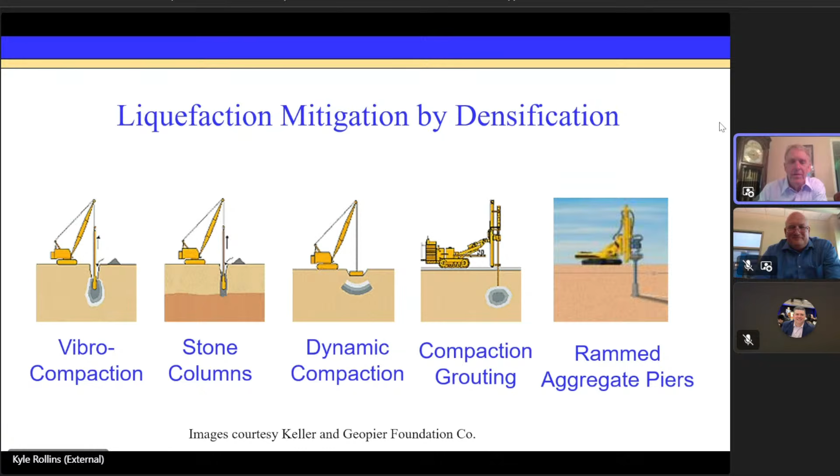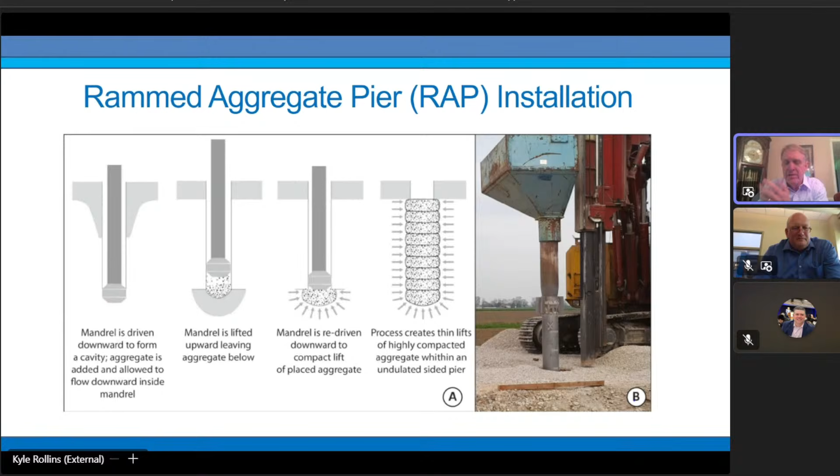Rammed aggregate piers use a mandrel that is driven into the ground surface to the depth you want to treat, and then gravel aggregate is put into the pipe, the mandrel. Then it's raised maybe 3-4 feet, and it has a compacting surface at the base that compacts the soil downward maybe 2 or 3 feet. So you have a lift that's compacted by impact and vibration. The idea is that this creates a compacted column of coarse aggregate, maybe half an inch D50 size, and it goes down through this mandrel and through the hopper at the top.

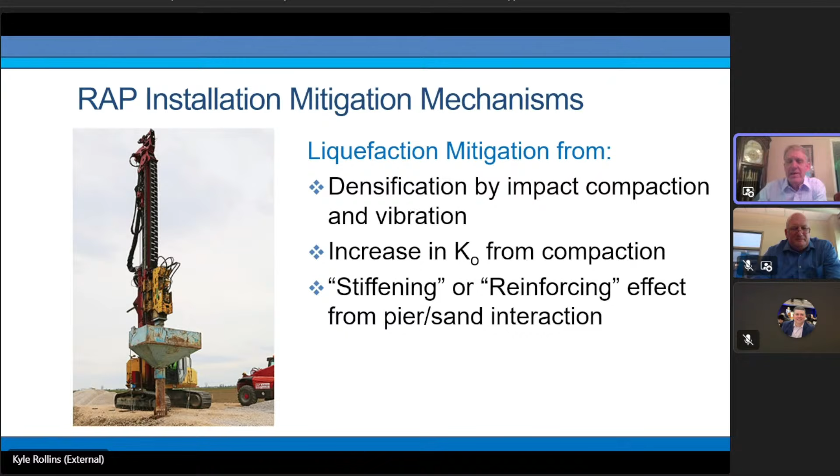There are a number of mechanisms that might contribute to reducing the potential for liquefaction. They include densification by the impact compactor and vibration that produces. Secondly, less well understood, is the increase in the at-rest earth pressure coefficient, K0, from the compaction process, because you're expanding the zone, compacting it into the side of the existing soil. That's likely to increase the horizontal pressure. Then there's a third effect that's even less understood, but we are seeing it more often: the stiffening or reinforcing effect because of the interaction between the piers and the surrounding soil.

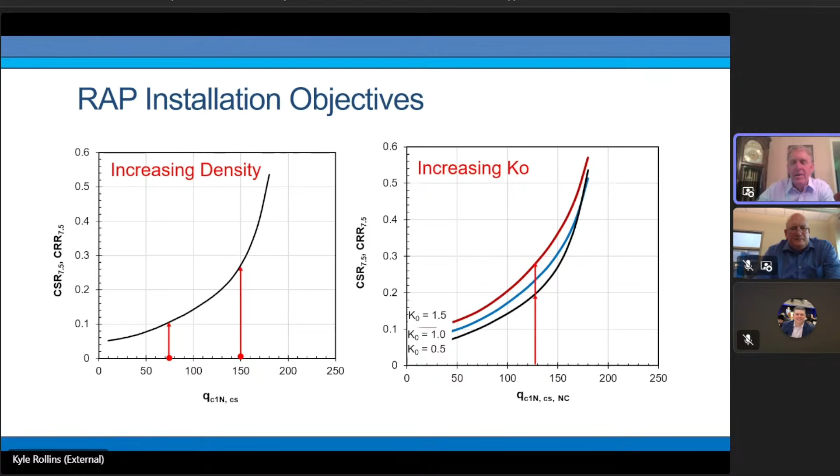But there are also some issues with the at-rest earth pressure. We know when we compact soils with the rammed aggregate pier approach, we increase the K0 value. The idea here would be that if we increase the horizontal earth pressure, we could also increase the cyclic resistance ratio due to that increase in K0. Not always considered, but an important effect, and I'll explain this a bit why.

What they showed in their paper was that the net result was no net improvement in the cyclic resistance ratio, the CRR, as K0 increased. Now that was back in 1997, and there's been a lot of additional work carried out.

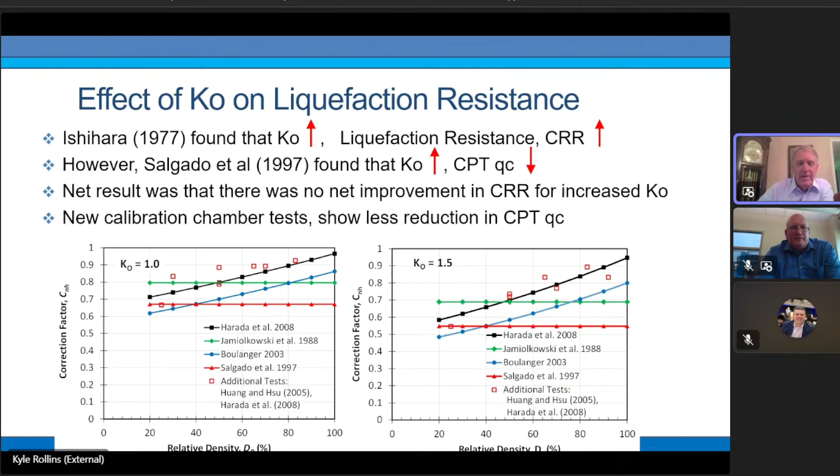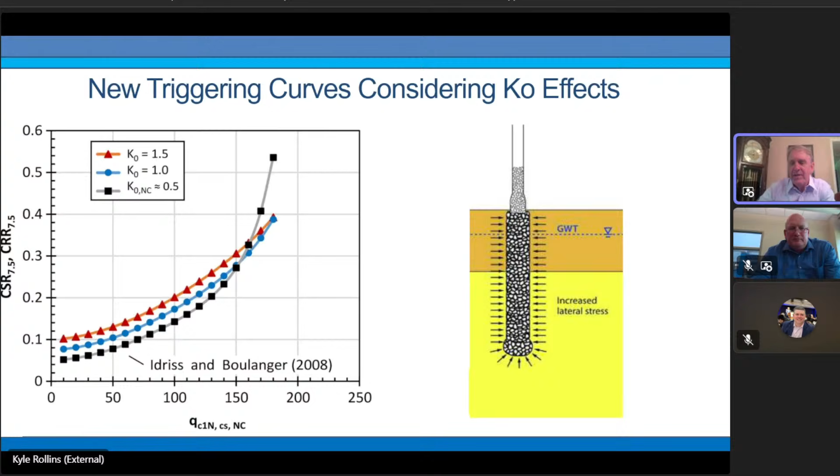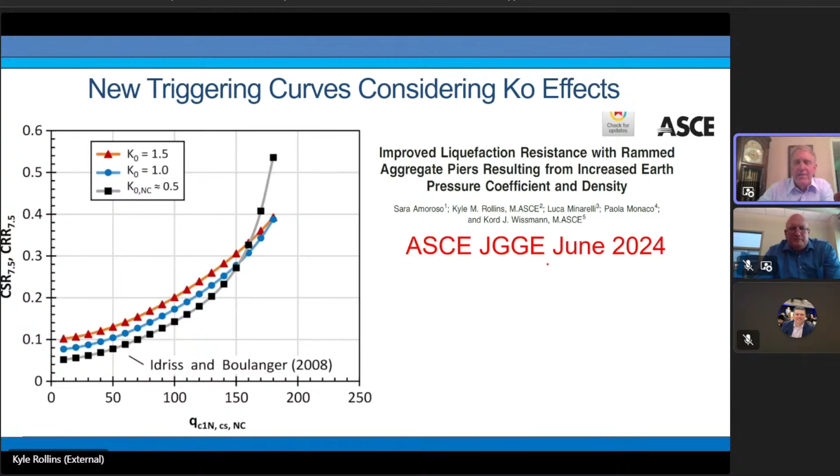So in a recent study, we took all the data and used this curve by Jamiolkowski. It's not the most liberal, but it's kind of conservative and top end. When we put that into the equations, we see an increase in cyclic resistance ratio with increases in K0. So as we're increasing the lateral stress from this and other methods, we could use these curves that are published in the ASCE Journal of Geotechnical and Geoenvironmental Engineering paper, journal, in June 2024.

So this gives us a logical basis for including those effects. One of the problems of considering K0 is that we have to estimate what it really is, and this is not as easy as we'd like it to be. There are equations proposed based on CPT and the dilatometer K sub D, but the best equations appear to be when you combine the effects from both the dilatometer K sub D value and the density from the Q sub C. When both of those are used together, you get the best estimation of K0.

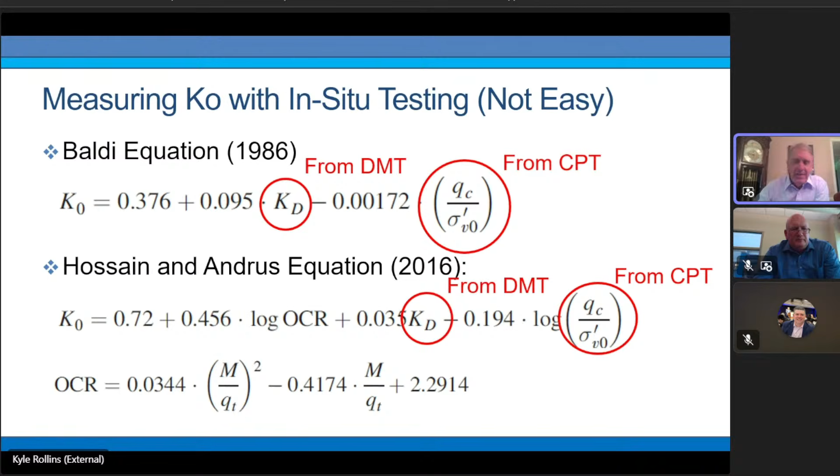Hossain and Andrus at Clemson did a similar thing using both DMT values and cone resistance QC values to estimate K0. But again, that uses both CPT and DMT data, which would require you to do both tests.

So as we do our research, we have this philosophy that one good test is worth 1,000 expert opinions. This was said by Wernher von Braun, who was the designer of the Saturn V moon rocket. And this wasn't because we're down on experts. We all want to be experts. That's why we listen to things like this and attend ASCE Geo-Institute congresses and so forth. But it means that we have to understand how the world really works. And once we do that, we can tailor our models and approaches so that they match real world behavior.

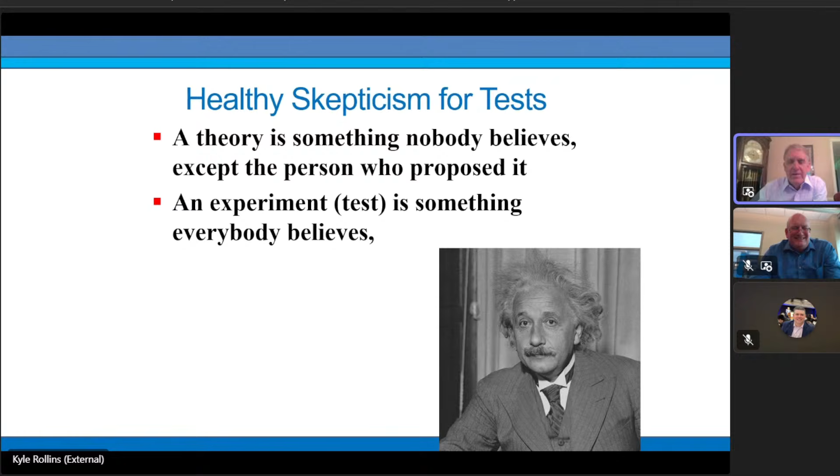I like to point out also that we have to have a healthy skepticism for tests. Einstein is reported to have said a theory is something that nobody believes except the person who proposed it, and an experiment or a test is something that everybody believes except the person who performed it. So we all know when we're doing a test that there are a lot of complications, and you almost never get a test that's perfect to where you have complete confidence. So you have to be a little skeptical and think through if this test is really what you think.

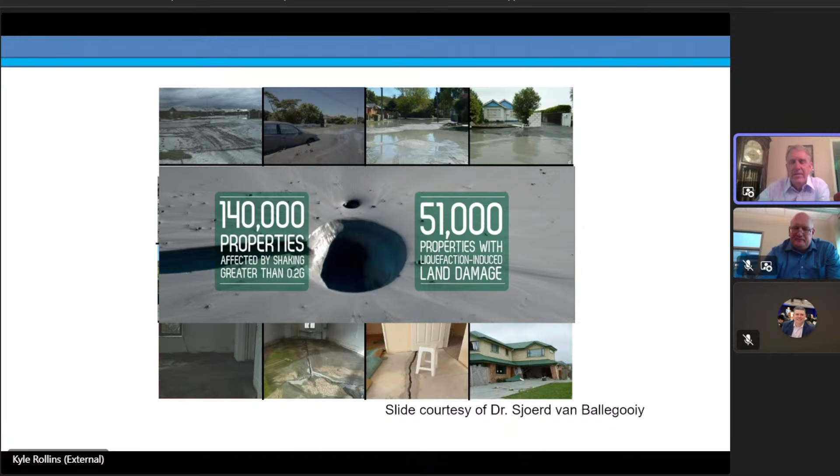One of the first opportunities I had where we were looking at liquefaction mitigation with rammed aggregate piers was after the Christchurch earthquake sequence, where they had 3 or 4 earthquakes that caused significant damage. Out of 140,000 properties, 51,000 were damaged by liquefaction problems, settlement, ejecta and so forth, and lateral spreading. That resulted in over $40 billion of economic damage to this small island in the South Pacific, and 33% of the financial loss was directly attributable to liquefaction in these red zone areas.

So I was part of a team that was looking at the most cost-effective means for mitigating liquefaction damage for low-rise structures so that they could be authorized for use in reconstruction efforts. In the 2010-2011 earthquake sequence in Christchurch, there was very little deformation that caused damage in areas with liquefiable soils overlain by an intact, relatively stiff, non-liquefying crust with a thickness more than, say, 10 to 12 feet.

So the series of tests commissioned by the New Zealand Earthquake Commission said, let's see if we can improve the top 4 meters of soil, allow the building to settle, but settle more uniformly, even if the ground underneath it, maybe 6 to 10 meters, liquefies. That's kind of a brave strategy, saying we can't really afford to improve all the ground, but maybe we'll make it so the deformation is acceptable.

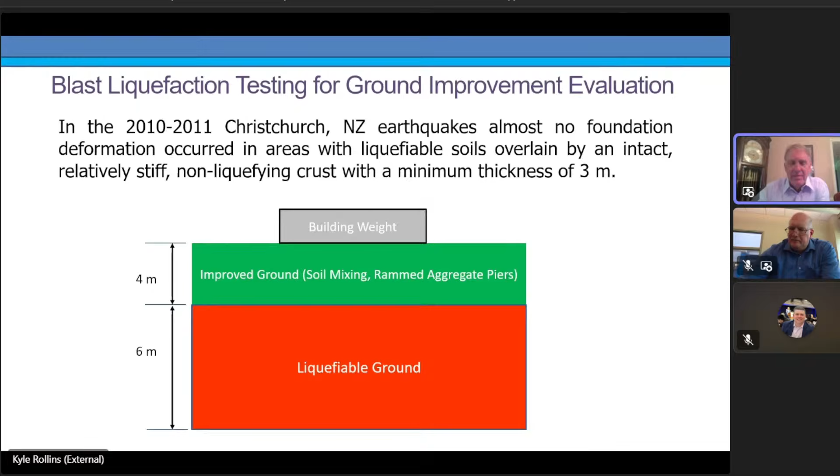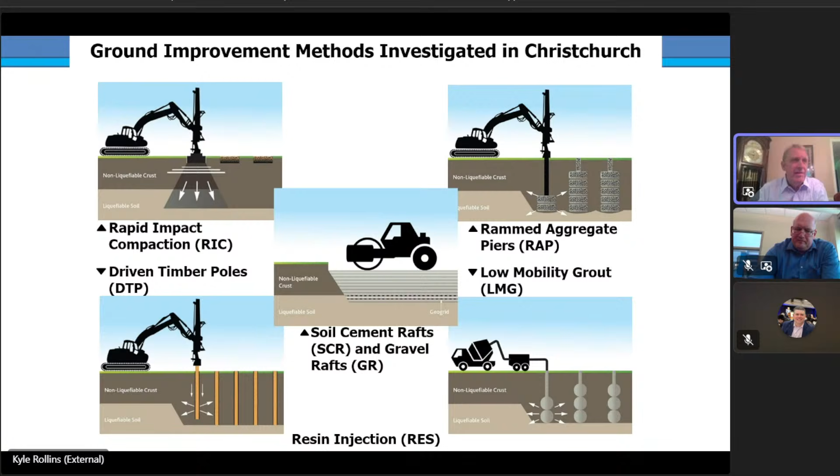As part of this $5 million study, they looked at 17 different strategies: rammed aggregate piers, low mobility grouts, soil cement rafts, resin injection, driven timber poles, and other approaches to try and create that 4-meter thick zone. The idea is the thicker the zone and the stiffer it is, the better it ought to perform.

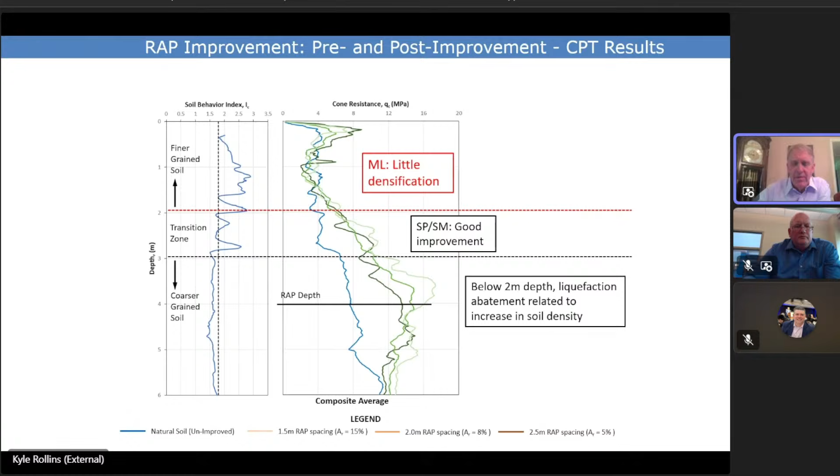One of the methods was the rammed aggregate pier approach, and we looked at the CPT values before and after treatment. In the finer grain soils, there wasn't much densification, but as it transitioned to the coarser grain materials, we saw a significant increase in the cone resistance due to the treatment. It even densified below the base of the RAP, which was impressive to all of us looking at this data.

In addition, we found that if we did shear wave velocities across the Geopier and in between the Geopier, we were seeing significant increases. It wasn't as much in the matrix soil—maybe increasing by 10%—but there's a 25% increase in the shear wave velocity as you go across the pier and back into the native soils. Now that has a big effect on the shear modulus, and that should affect what's going on. But it's hard to know how this really factors into the performance.

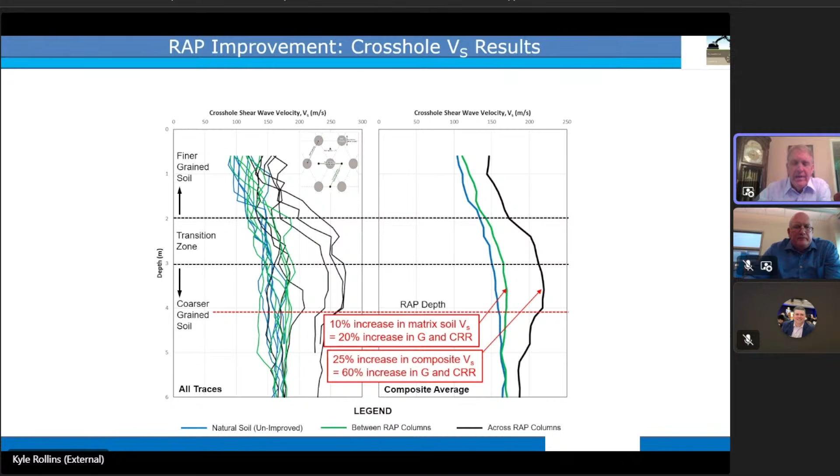So to see how all these factors—increases in density, K0, and shear modulus—were affecting things, we did a series of blast-induced liquefactions. There were 7 tests, 17 ground improvements, some houses we tested, manholes and pipes, and 3 fully instrumented continuous flight auger piles. My job was to measure the excess pore pressures and the settlement and come up with the blast charge that we were going to use.

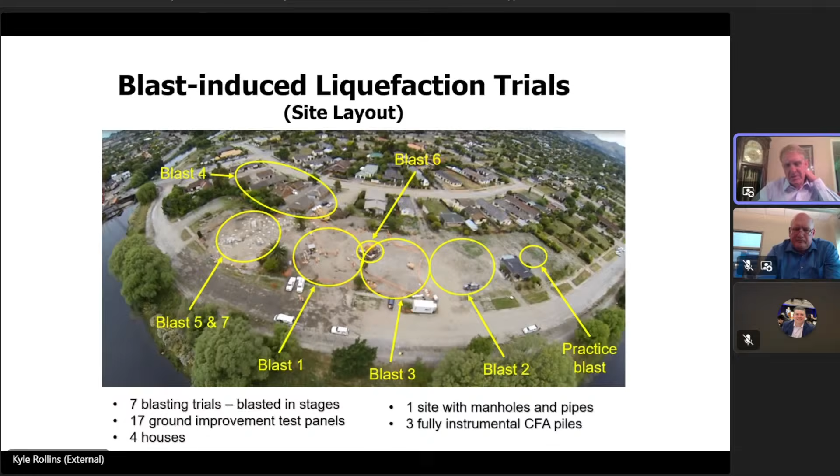So when I first heard about blast-induced liquefaction, my mind went back to this movie, Butch Cassidy and the Sundance Kid. 'Well, that ought to do it.'

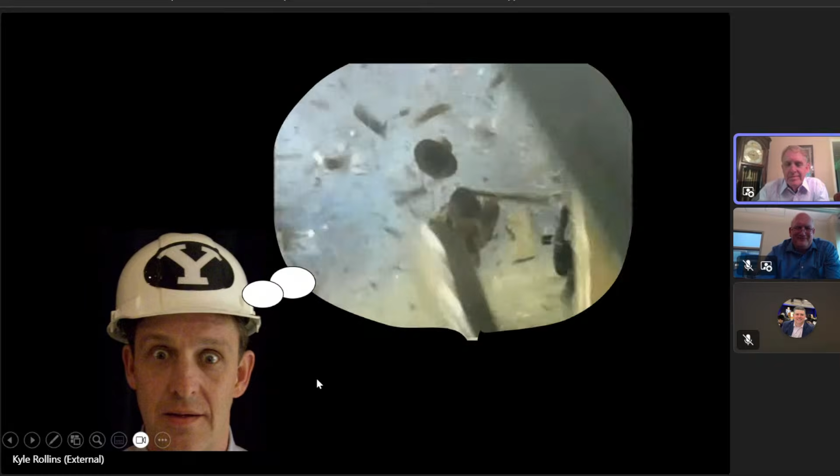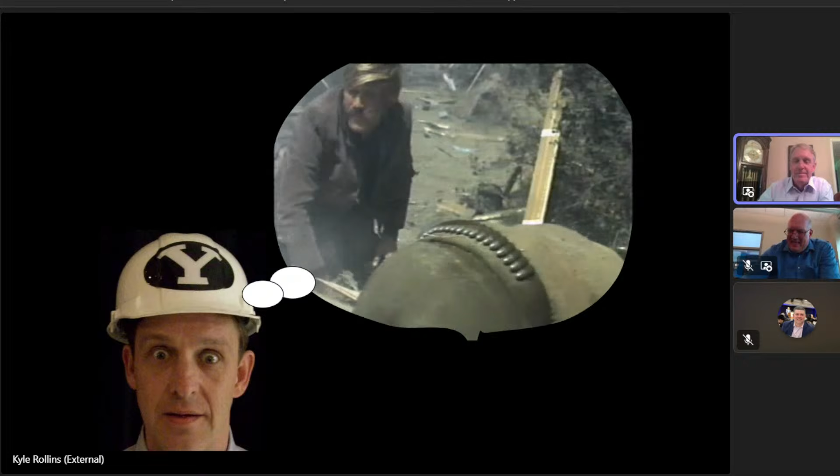We were trying to get enough explosives to blow up the safe, and that's what you just saw. 'Think you used enough dynamite there, Butch?' So that's what I first thought about this—a pretty crazy thing. When we showed up for our first job on Treasure Island, the blaster shook my hand and said, 'Hi, I'm Butch.' Then I got really nervous, but things turned out all right.

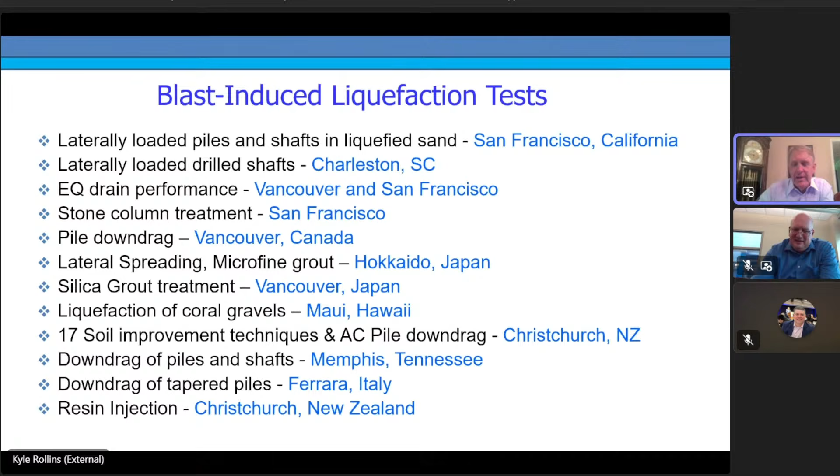Over the last 20 years or so, we've done liquefaction tests all over the world, investigating the performance of piles and ground improvement strategies. And that's what we used in Christchurch.

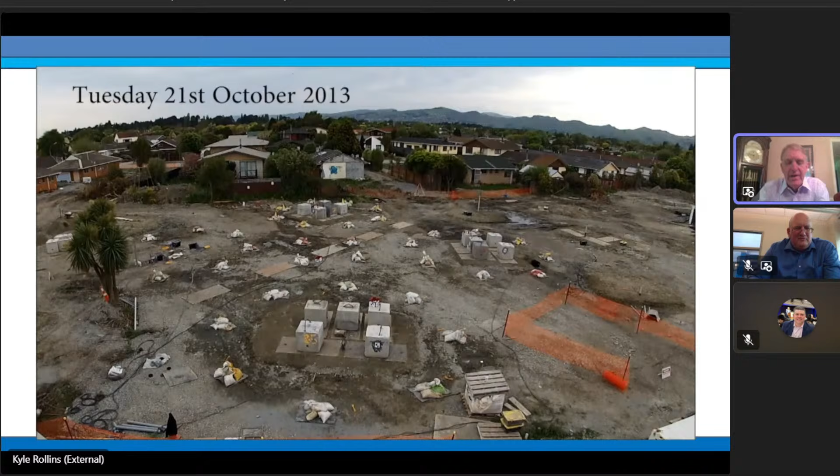So here I'll show you some tests. We're doing an unimproved site in the middle, improved ground with ground improvement strategies all around here, and a continuous flight auger test down there, to see how they would perform. We're liquefying down to about 10 meters below the improved ground.

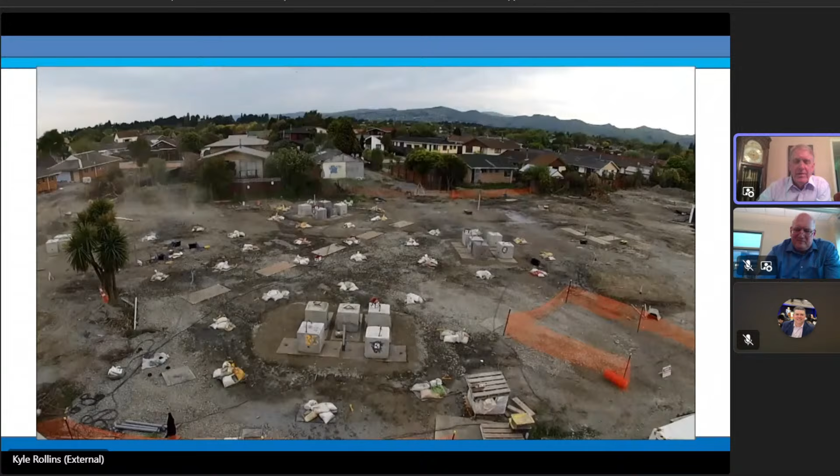That was about 230 pounds of explosives detonating over a 10-second period to boost excess pore pressure ratios. We were very successful with that.

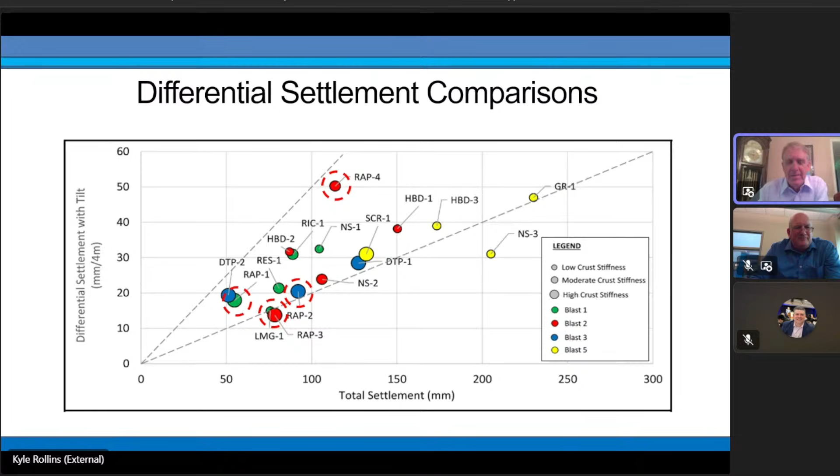It might not be a good idea, and points out the need for investigation to make sure that the quality control is up to snuff.

You always want to find two case histories with contrasting performance, so you can see what is causing the different effects to occur. So we're going to look at the Boca de Briceño Bridge and the Mejia Bridge. Both have similar peak ground accelerations, but completely different performance.

This is the Mejia Bridge. We went to this early on, and it was really amazing for us to see the failure. It slumped down, cars had fallen into these grabens, and the soil had moved outward maybe 5 meters. A real circular failure, and that caused lateral spreading in the liquefiable soil below it. The layering here was interbedded sands and silty sands with some clay layers, even some gravel layers. But there was really terrible performance of this bridge.

Then some people told us, hey, you need to go up to Boca de Briceño because it has had ground improvement and it's completely different. So we went up there and the team was actually quite amazed. It's even closer to the epicenter, a little higher acceleration, but very similar ground conditions, interbedded silty sands with some gravel.

Can you see that pavement? There was an approach fill that had been treated with rammed aggregate piers, and there was very little deformation. You can see where that car's parked, that there was some movement back and forth that caused some damage to the pavement, but it could be easily repaired. We were able to travel over the approach fill and see everything in good shape.

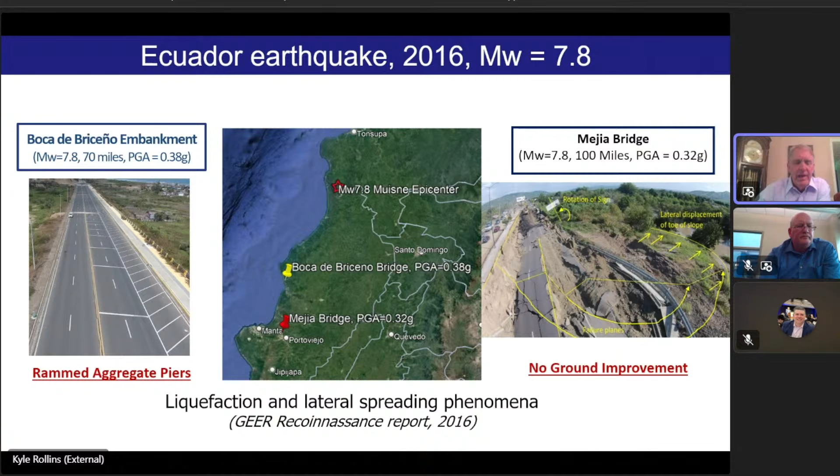This is looking at the Boca de Briceño embankment. It's a 700-meter zone for the approach fill, and then a 70-meter bridge. It was easy to find, going off the road a little bit, lots of examples of liquefaction taking place with characteristic sand boils all over the ground outside the treated area. But as we came up to the improved zone, there was very little movement of the abutments and very little damage to the roadway.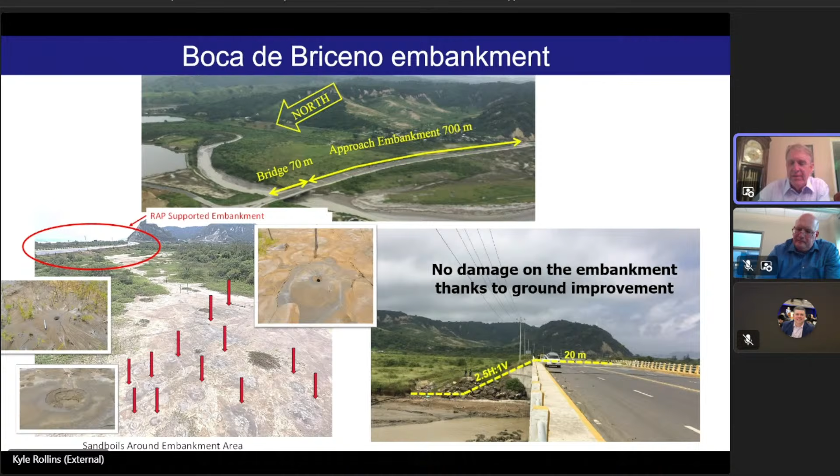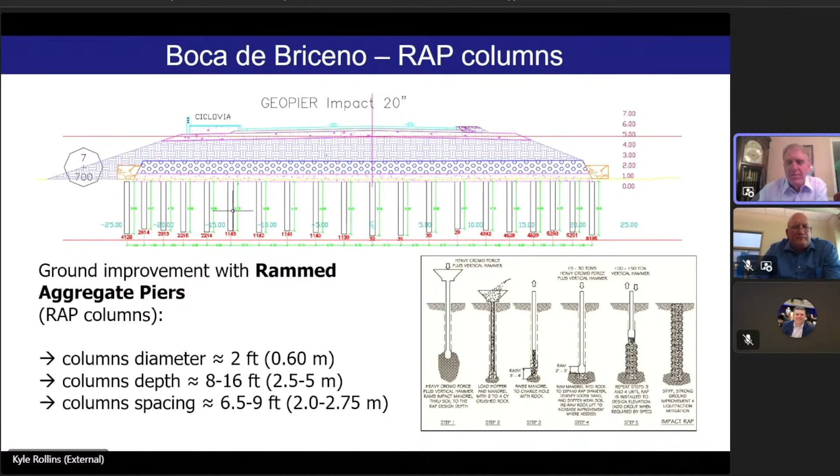We went back to the plans, and Geopier had installed these impact compaction piers. They're 20 inches, about 2 feet in diameter. They went and treated 8 to 16 feet below the approach fill, spaced 6.5 to 9 feet on centers. As they went back to less critical areas, they increased the spacing and went through the same process of improvement that we've talked about already.

Some of my partners, Sarah Amoroso, an expert in DMT, and Brady Cox, an expert with shear wave velocity, went down to the site and did a lot of measurements in the untreated ground and in the treated ground underneath the embankment. The liquefied layer is shown in yellow outside the embankment, and inside you can see that interbedded nature up at the top - sandy silt, and then sand and silty sand layers. The rammed aggregate piers are supporting the embankment and densifying it.

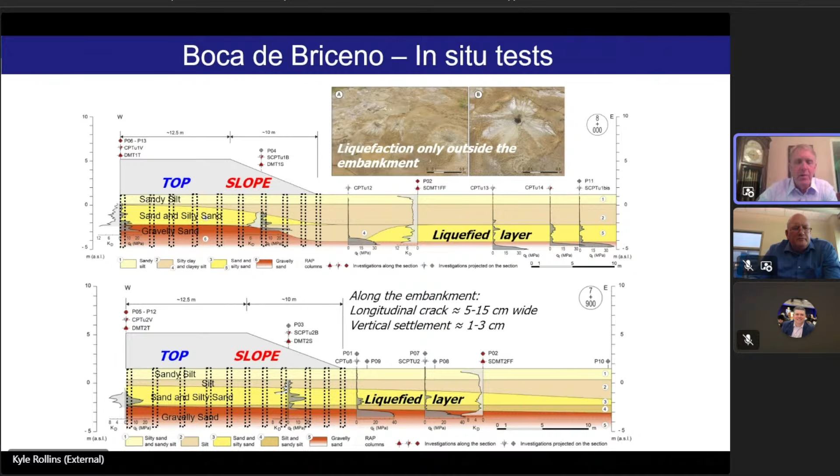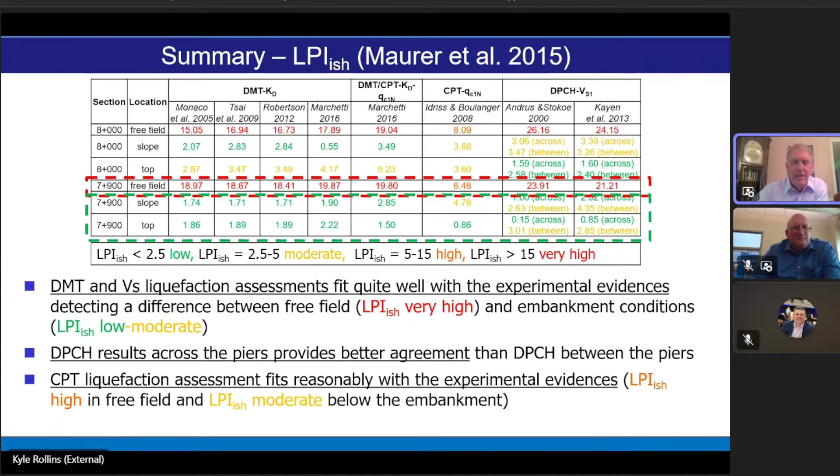Let's go to another cross section. Here again, outside the treated area, everything's high potential for liquefaction. Then when we go to the same cross section, most of the zones from different improvement estimations - DMT, CPT, and shear wave velocity - show that we've reduced the potential for liquefaction to a low level.

Another approach was to estimate what might have happened if we used a pseudostatic analysis that considered the peak ground acceleration going on. This was done by Smith and Wissmann, reported at the meeting on soil dynamics and earthquake engineering in 2018. If they just used the CPT results obtained from these investigations, they get a factor of safety of less than 1.

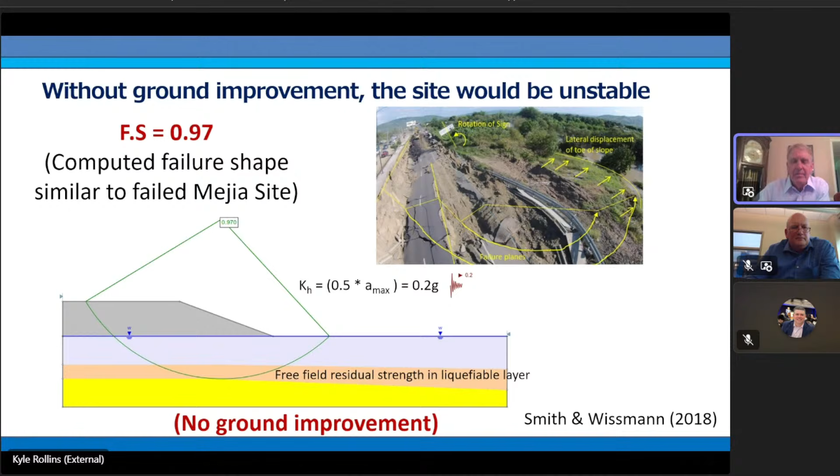A factor of safety less than 1 indicates there would be slope failure. And this is the case - it's a similar kind of rotational failure that we saw at Mejia Bridge, with all that lateral movement.

Now, if you increase the resistance to consider the improvement provided by the rammed aggregate pier installation, just considering only the densification, the factor of safety goes up to 1.08. My dad wouldn't have been too excited about that - he would say we need to do something more. But that's what the factor of safety is.

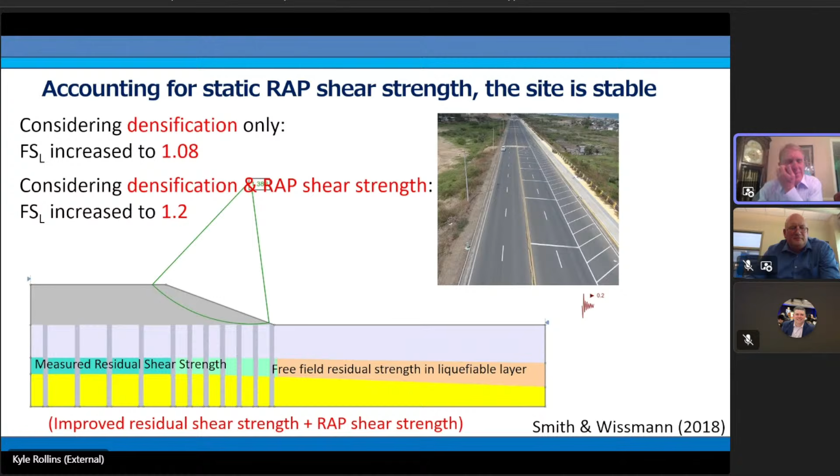If you consider densification and the RAP shear strength - considering only the portion that's actually being replaced - the factor of safety increases to 1.2, where you'd suspect the pore pressures would be reduced enough for pretty good performance. And that was actually the case, so that agrees with what we saw in the field performance. That's a pretty good indicator that you might want to use that reinforcement strength in the rammed aggregate piers to get agreement with field behavior.

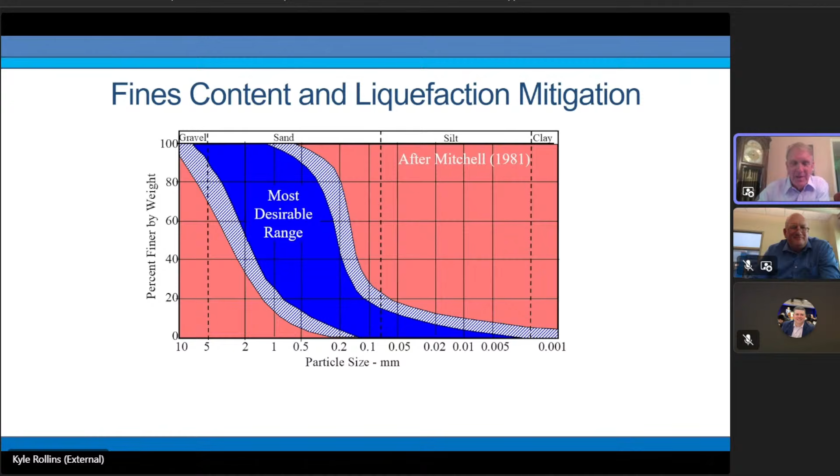But oftentimes we have cases outside these ranges, and then we're left to think, what can we do? Which sometimes leads to soil mixing and very expensive efforts. Mitchell pointed out that fines tend to reduce the permeability, making it less likely to be improved during vibration compaction treatments. The fines also tend to strengthen the soil structure. So what can we do?

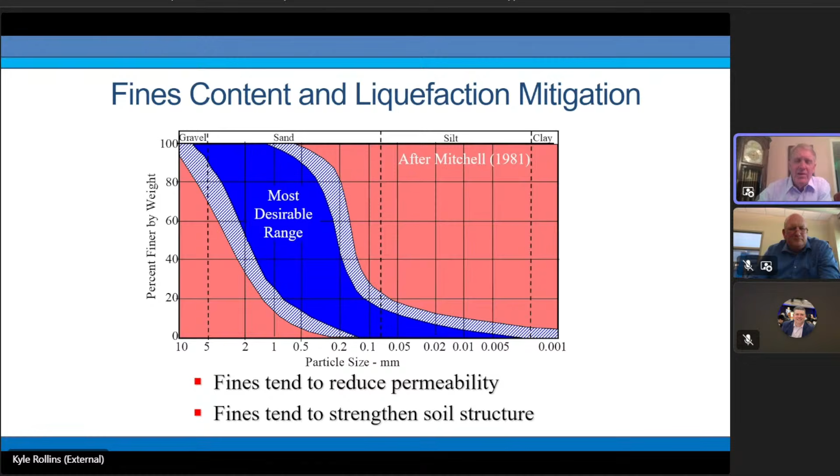We wanted to investigate the effectiveness of rammed aggregate piers at sites with higher fines contents. So we went to a site where they'd let us do blast testing. It's in northern Italy, in a city called Bondeno, near Bologna, or Ferrara, where they make Ferraris.

So we did see the museum while we were there. You can see this aerial photo of the track rig inserting the Geopiers, here's the forklift dropping in the aggregate. This was again about a 12.5 millimeter diameter, half-inch D50 size.

One of the things that was important here we found is this working platform. We were on soft ground, and the working platform wasn't the best, and we started tipping when we got to the edge. I know DFI has a manual out for working platforms, and from my little experience, I'd suggest you pay attention to that.

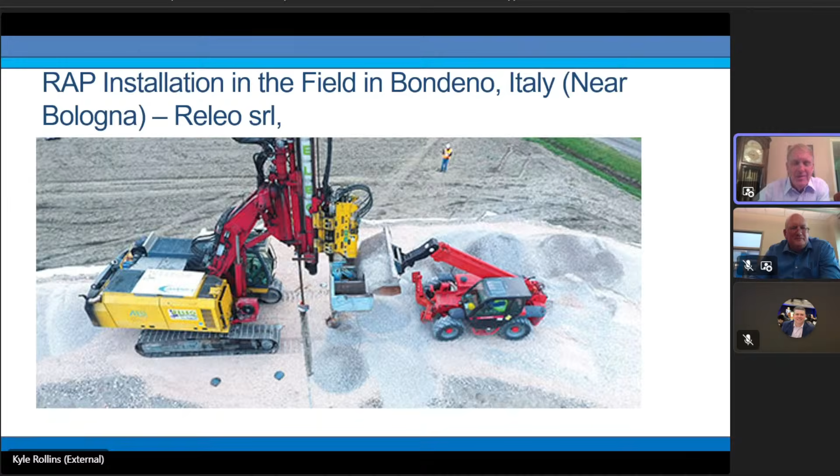So what we did at this site is put in 16 Geopiers - Releo SRL out of Bondeno did this installation of 16 Geopiers in a 4x4 arrangement. They're 0.5 meter diameter, about 20 inches, and they're 2 meters on center, extending to 9.5 meters into the ground, which was the zone we thought had most of the potential for liquefaction. We have those shown in blue dots.

We monitored the pore pressure. We monitored the settlement in each of those rings. We had one zone we'll call the natural panel, where we didn't do any treatment at all. And then we had another where we improved the ground with these rammed aggregate piers.

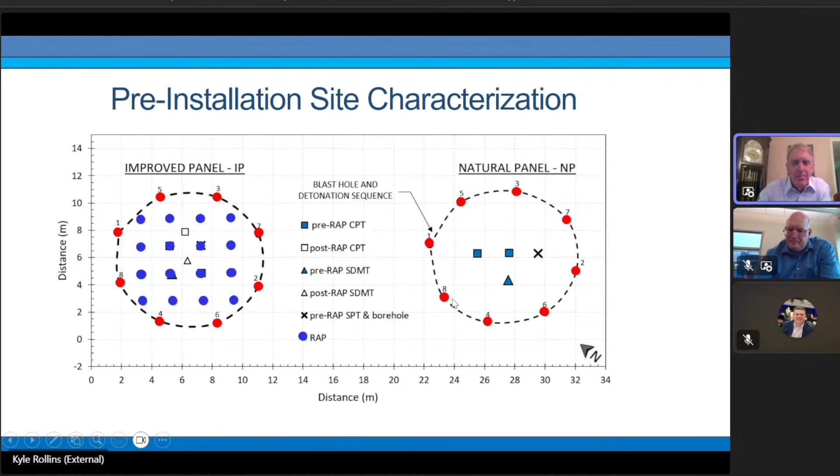These red circles are where we detonated explosive charges. We detonated in the sequence you see here: 1, 2, 3, 4, 5, 6, 7, 8 - trying to get movement going across the site.

This shows the site characterization prior to treatment. We had a clay layer, Holocene material with low Q sub T. Then we get into a silty sand - it's also silty, SM material, Holocene. And then we get into a silty sand, sandy silt, late Pleistocene, less likely to liquefy.

The average Q sub T values in the improved area and natural panel were very similar. The average I sub C in the zone we're treating is 1.6. Correlations that predict fines content aren't doing a very good job here, estimating only 5% fines, when in reality it was between 20 and 40% based on SPT sampling. The K-naught was pretty high and about the same in both areas, and shear wave velocity was similar in both panels, so we knew we had an apples to apples comparison.

As we started the test, we put in a lot of survey stakes across here to monitor the settlement of the ground. We also put in pore pressure transducers to monitor the water pressure, and we monitored the settlement with aerial drones to see what was going on.

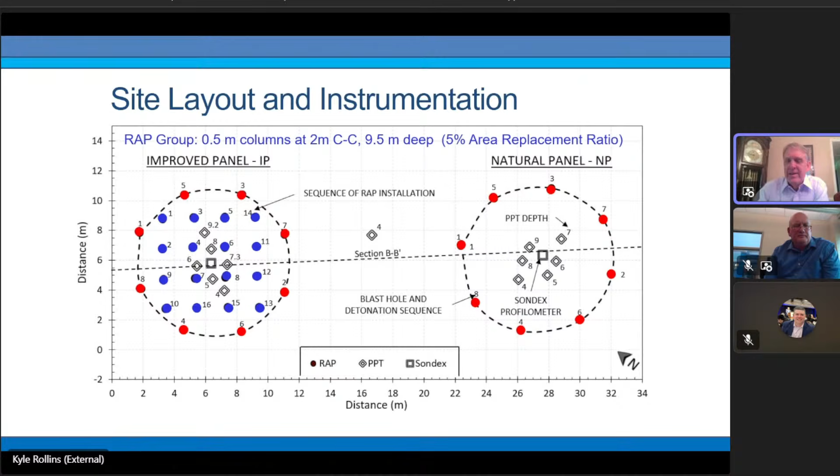The columns were 0.5 meter in diameter, spaced at 2 meters center to center, a 5% area replacement ratio—not very large. This plot shows the improvement that takes place, with the treated zone shown by dashed red lines. The Q sub T value went up, not as much in siltier areas, but about a 30% increase overall. The I sub C value didn't change much after improvement. Using Kulhawy's equation for relative density, we get a 13% increase—maybe not very big, but still substantial for the soil conditions we were working in.

We also see that we're increasing K-naught post-treatment. The red is post-treatment, the black is initial—so 30 to 100% higher in K-naught.

The factor of safety against liquefaction in the treated zone averaged about 0.87 before, and this area did show sand boils and fissures where ejecta came to the surface—it was subjected to an earthquake in 2012 and did liquefy. After the improvement, the factor of safety was 1.28, which was sufficient by their standards to call this a successful improvement site.

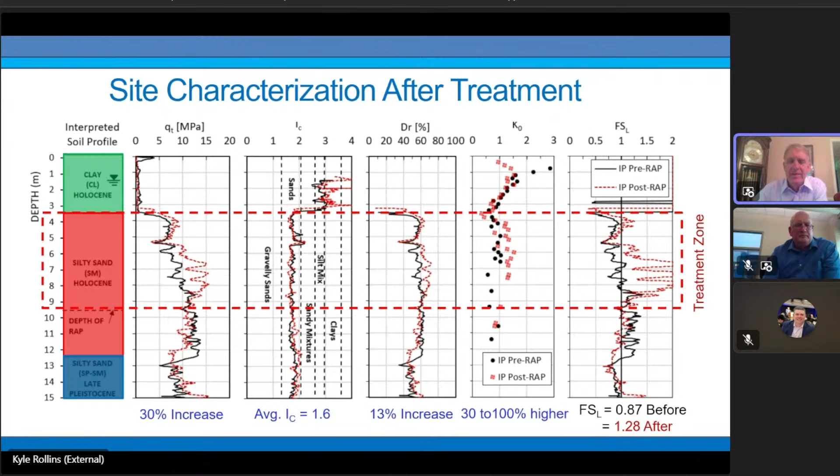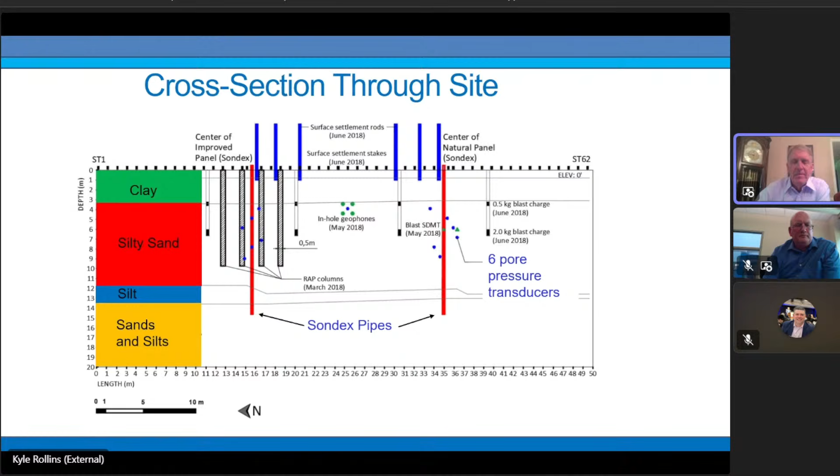But we wanted to see how it would behave if we liquefied it again. We put some weights on here as well, and we're going to monitor the settlement and the pore pressure taking place.

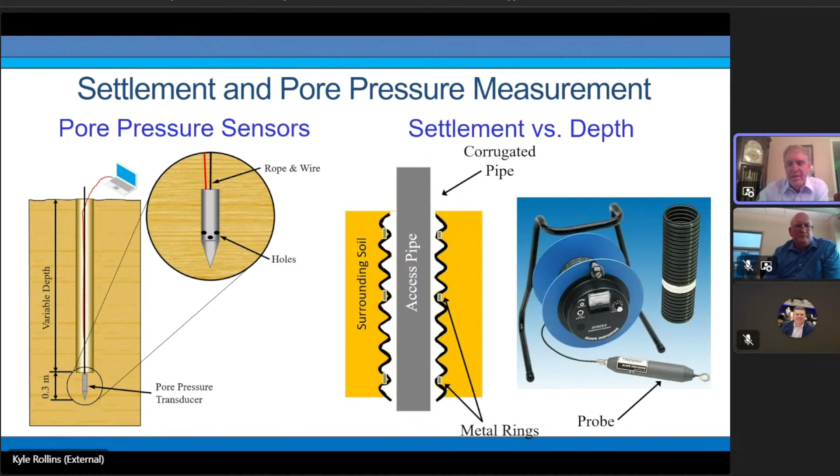Pore pressure transducers could take the blast pressures and still survive, giving us accurate readings. We had Sondex pipes so the surrounding soil could settle and we could monitor settlement as a function of depth—as this corrugated pipe goes down with the settling soil, we can see how much settlement has taken place versus depth.

Here's a video of that blast. We had a big crowd out to watch.

Shortly after the blast, we started to see water and sand ejected coming to the surface. You may be able to spot that in the middle there—there's another blast of water coming out in the middle of the area, and then one outside the periphery, 5 meters away from the center of the treated area. There go the drones. As the excess pore pressures are relieved, they're carrying that sand—you can see how dirty it is coming to the ground surface.

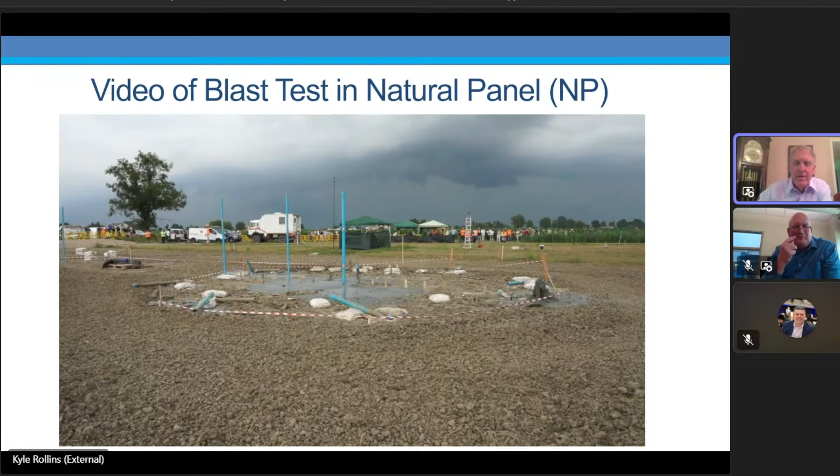It was a jaw-dropping experience for everybody there, because the contrast between the natural panel and the improved panel was fairly dramatic. We could see all this sand and ejecta that had come to the surface in the untreated area, while in comparison there was very little ejecta and water in the improved panel. There was also, as we'll see in a minute, a lot more settlement. This was rather surprising to everyone.

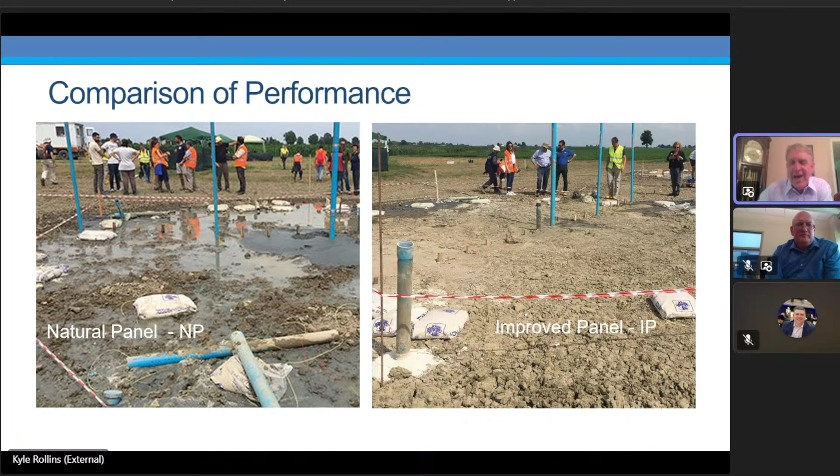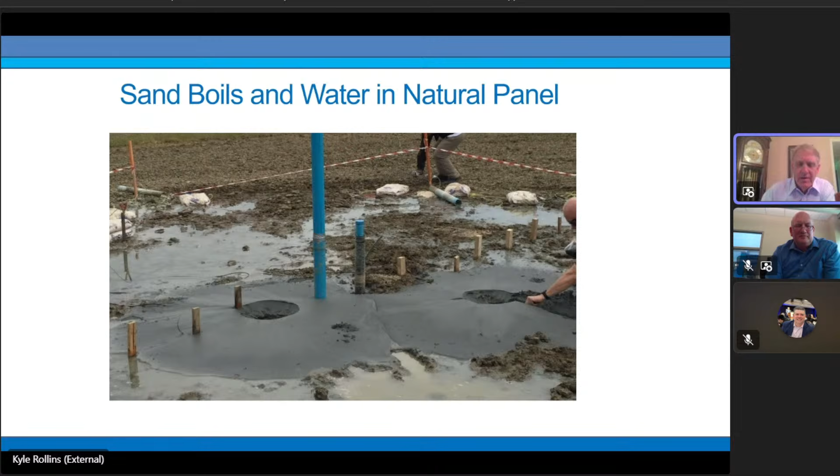This ejecta is particularly important because in Christchurch, about 33% of the problem was attributed to ejecta leading to settlement of structures, so the lack of ejecta here was important. Inside the untreated natural panel, you can see sand boils and sand volcanoes producing substantial volumes of material, with excess pore pressure pretty high, getting up to 100%. In the improved panel, a couple were high, but most were down in the 70% range.

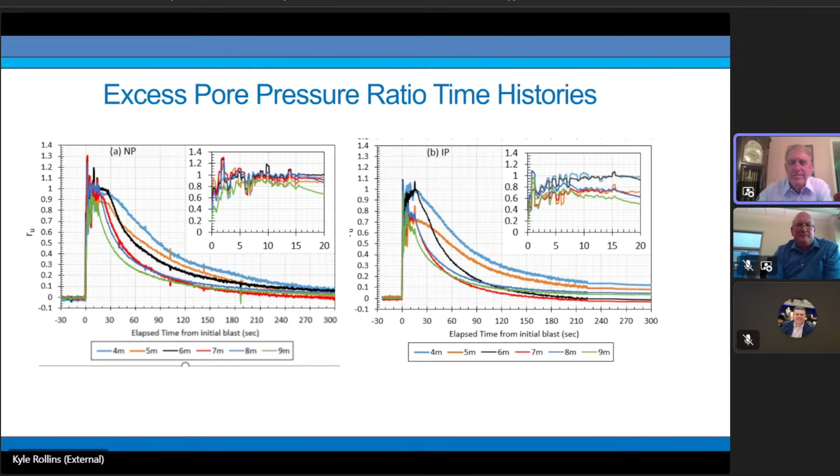We had a 1 pound charge at 4 meters and a 4 pound charge at 6.5 meters. Where the explosive charge went off, we overdid it - maybe our blast was like Butch and the Sundance Kid. Maybe we had too much there, but we've got excess pore pressures of 1 there.

But in the remainder, most of the area, we're seeing values of 70% or so, whereas in the natural panel, everything basically liquefied with an excess pore pressure ratio of 1.

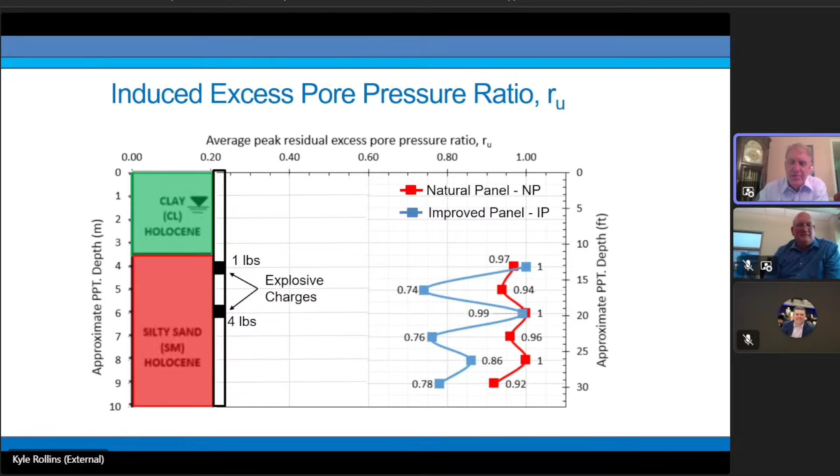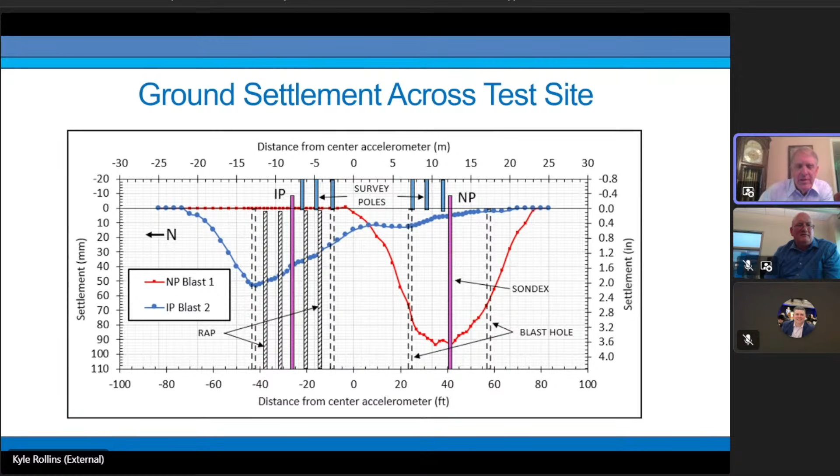We looked back and thought of the construction process. They immediately started this company, this affiliate for Geopier. This was their first job in Italy, and they started immediately on our production piles. I understand that most jobs have a test pile area where they make sure everything is working right.

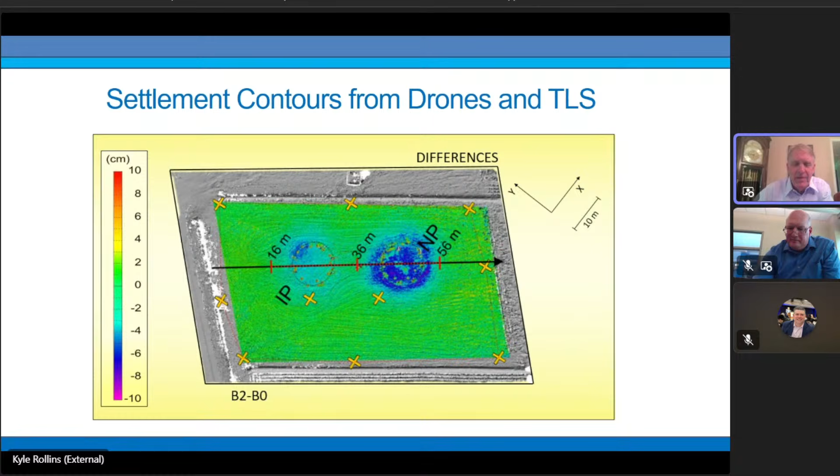In those first 2 or 3 Geopiers, what we saw is that when they did a constrained or sustained loading test, where they're putting the full weight and pressure of the equipment on it, we were getting a lot of settlement, 8 to 10, 12 inches. So the piers weren't being adequately compacted, and they went back to the drawing board and improved it, and got better performance with less than an inch or so at the other piers. So we think that was just a flaw that probably wouldn't normally be there.

Our friends at University of Torino came down and did electrical resistivity tests. Can you see on that side where they were just recently put into place before the blast test? There's diffusion here where they really haven't improved the Geopier as substantially as it was in the other zones.

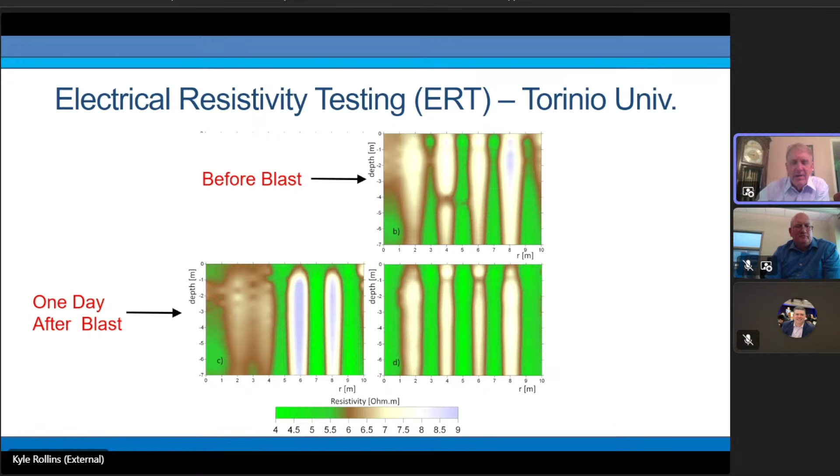And one day after blast, there's a lot of smearing here that settlement is taking place, more that was taking place there. Then 2 months after blast, the piers are distinct again. So we think this was a sign that the piers weren't put together very well at that corner.

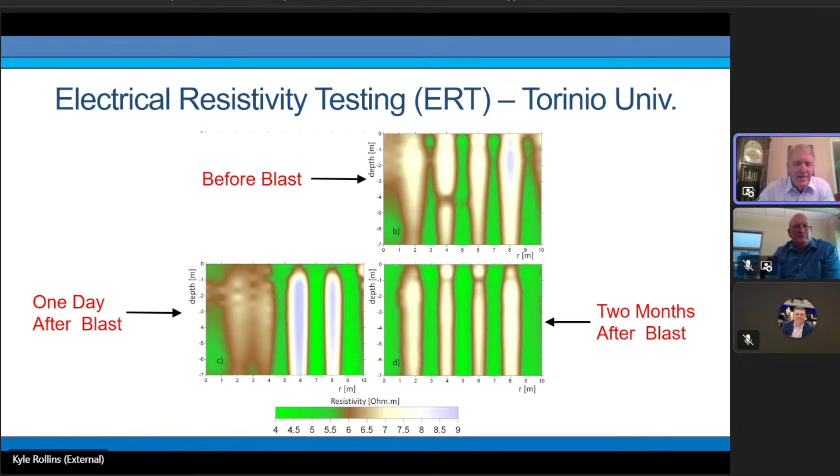Here again, pointing out the need for quality control and dealing with the problems when you see them.

And at the installation depth, a lot of settlement was still taking place. We probably didn't treat as deeply as we needed to. It's hard to know how far the blast is going to treat.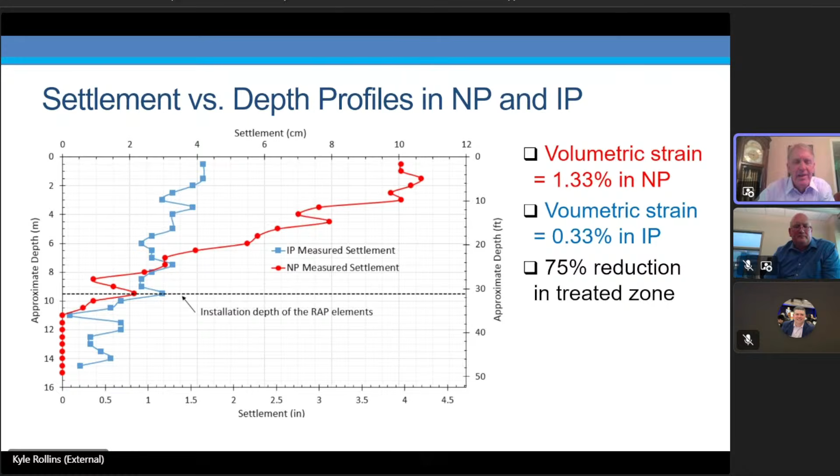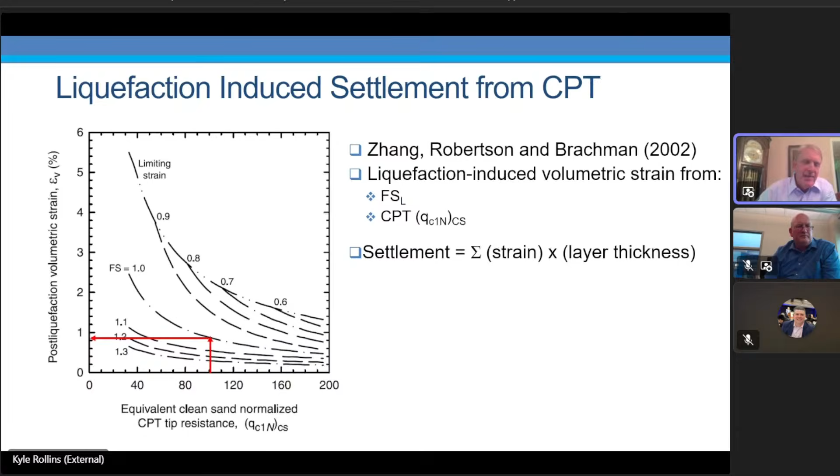We wanted to see, could we predict this or compute it in some reasonable way? We used Zhang, Robertson, and Brachman's 2002 approach. We need the factor of safety against liquefaction and the CPT. So we come up to a factor of safety from our Q sub C1N CS and estimate the volumetric strain.

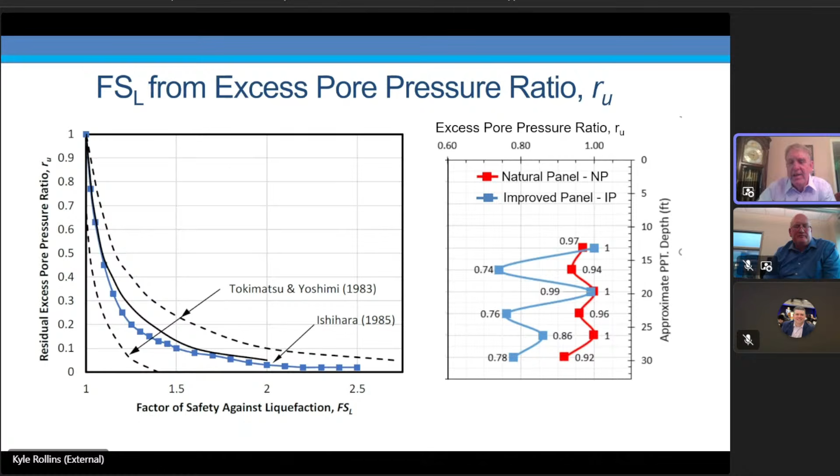Knowing that CPT, we also needed to get the factor of safety, or the residual excess pore pressure ratio can be used to get the factor of safety. We knew the pore pressure, so we could estimate the factor of safety.

We said, okay, let's use that exact same approach and calculate what we'd get for the settlement in the improved panel. And when we did that, we found out that we were overestimating the settlement that actually took place relative to the measured value - we're 50% off. So considering the excellent agreement we had with the natural panel, we were pretty discouraged.

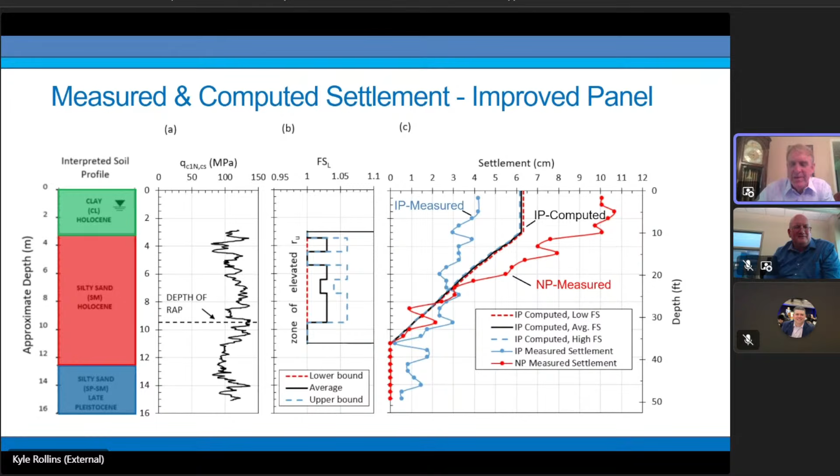Thinking further about it, we said maybe what we need to do is consider the stiffening effect of the rammed aggregate piers so that we can convert these columns and the natural soil into a uniform composite material and compute the settlement using this equation down here.

The settlement due to reconsolidation is equal to the reapplied pressure, which is equal to 1 minus the excess pore pressure ratio times the vertical effective stress that the soil is under before liquefaction. We knew the excess pore pressure ratio we were expecting, so we could calculate that value. H is the total thickness of the liquefied layer, and the denominator is the composite stiffness of the columns and the soil.

So we took the constrained modulus of the rammed aggregate pier times the fraction of the zone that was improved. We could get this value from a catalog of static load tests that Geopier had conducted on rammed aggregate piers, about 20 tests or so over their range of testing period.

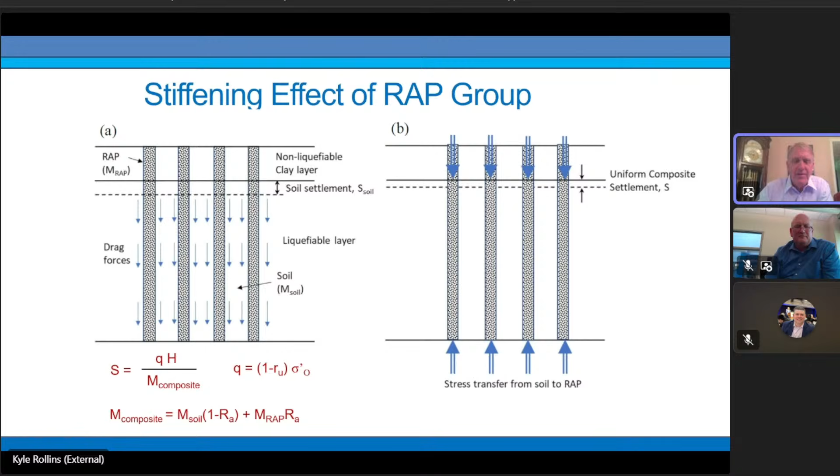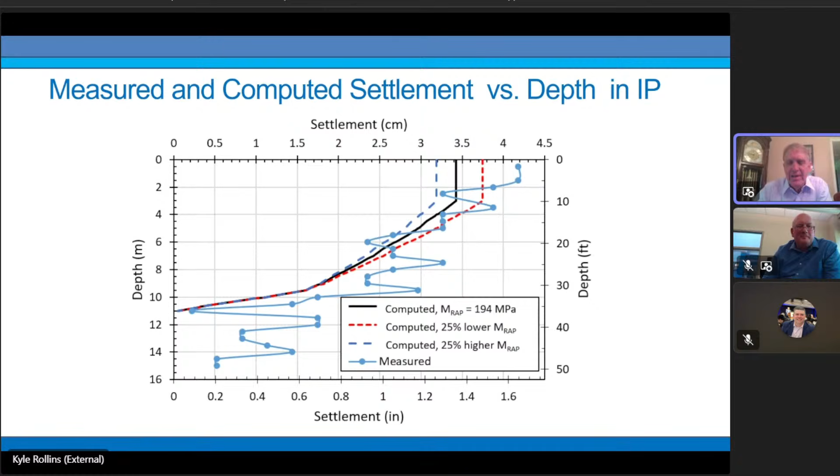Then we have the modulus of the liquefied soil times 1 minus the replacement ratio. We got these modulus values of liquefied soil from the Zhang et al. approach that we had used to get the settlement of the soil so well in the previous example. When we put those two together, using a plus and minus 25% range, we start to see agreement that's consistent with what was measured. So in order to get acceptable agreement, we needed to consider the stiffness and reinforcing effect of the RAP.

Concluding and wrapping up here, the RAP treatment reduces the liquefaction hazard by three mechanisms. It improves the density, it increases the lateral earth pressure, which you can take into account with the curves we've produced in our 2024 paper in the ASCE Geotechnical Journal in June. And then there are reinforcing effects, which we saw both in terms of vertical settlement from volumetric strain in Italy, and the reinforcing effects we saw from the earthquake performance in Ecuador.

So these effects are confirmed by the blast liquefaction test that we saw in New Zealand in 2013, confirmed by performance in the Ecuador earthquake in 2016, and by the blast-induced liquefaction tests we've done in Italy. So my message would be trust, but verify.

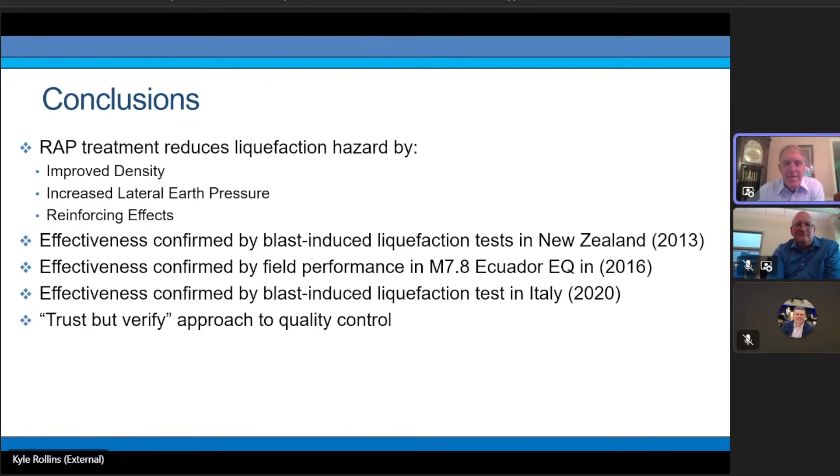Just because you're putting piers in doesn't mean they're all getting done well. So do the testing, the quality control, to make sure things are done well. A pilot approach before production, which is the standard procedure for Geopier, is a good approach to see that you're really getting improvement. Do the test with the dilatometer and CPT and see if you can account on increased K-naught values and so forth. Anyway, thanks very much for your kind attention.